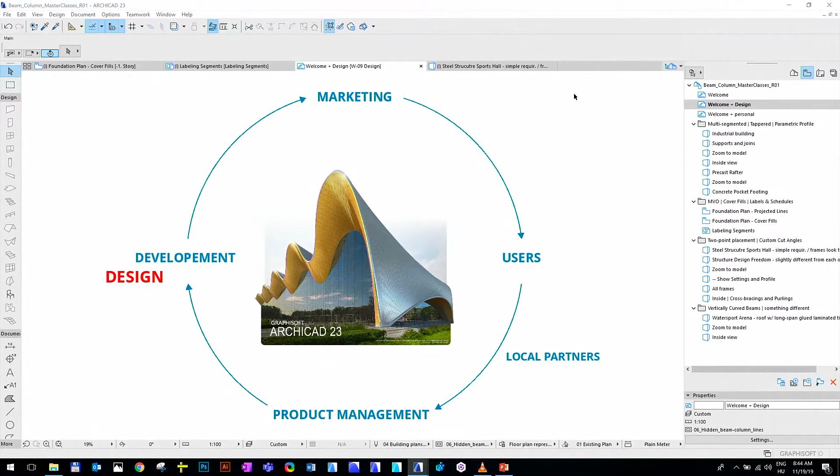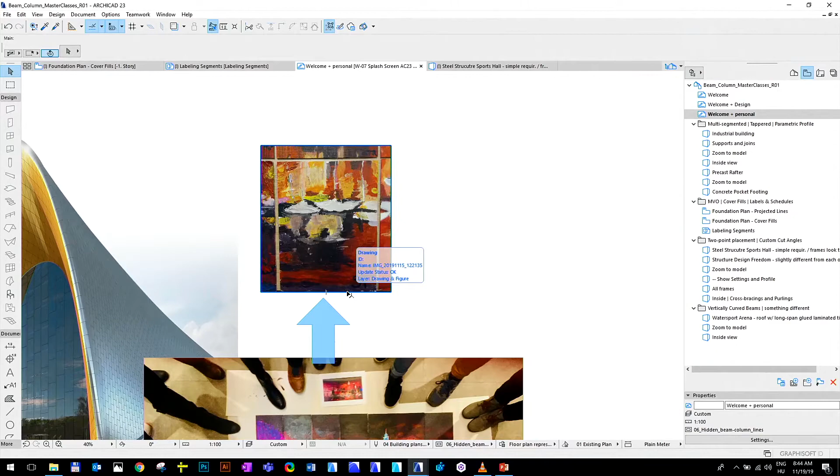And each of us got a slice like this, which is quite abstract, and it's really hard to see the big picture from this small one. So think about this as your profession. You are doing something that you are really good at, that you are concentrating on, and you try to make it the best you could.

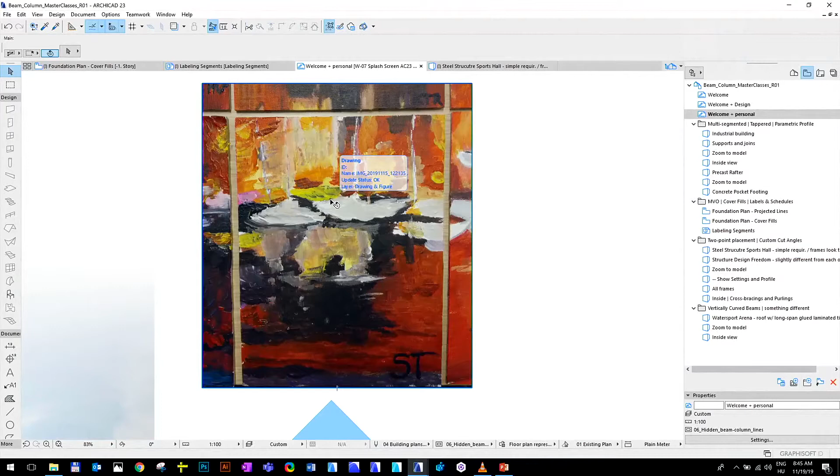But this is not enough in the end of the day to deliver the full picture for your clients, because you are in close relationship with all your neighbors, and your neighbors in this example are the other disciplines working with you. If you're an architect, you work with MEP engineers, structural engineers, interior designers, landscape architects, and the list is quite long. You are just doing a small picture, which is important for you and for the whole project, but you need to cooperate and collaborate with each other.

And why am I talking about this? Recently at Graphisoft headquarters, at the development, there were two main focuses to carry on with developing ARCHICAD. The first one was productivity. We want to deliver tools for you to work faster, to achieve your goals in a productive way. The other thing is collaboration. In the further years, we want to enhance collaboration between those disciplines to make their work easier together, to make that communication really good. This presentation will be mainly about these topics, and of course the new features of ARCHICAD 23.

Let's just jump into the first feature that I want to talk about, which is the new beam and column tool. The beam and column tool has been around in ARCHICAD for like forever. It is an essential part of architectural design, and we made some changes so it could fit more this collaboration theme.

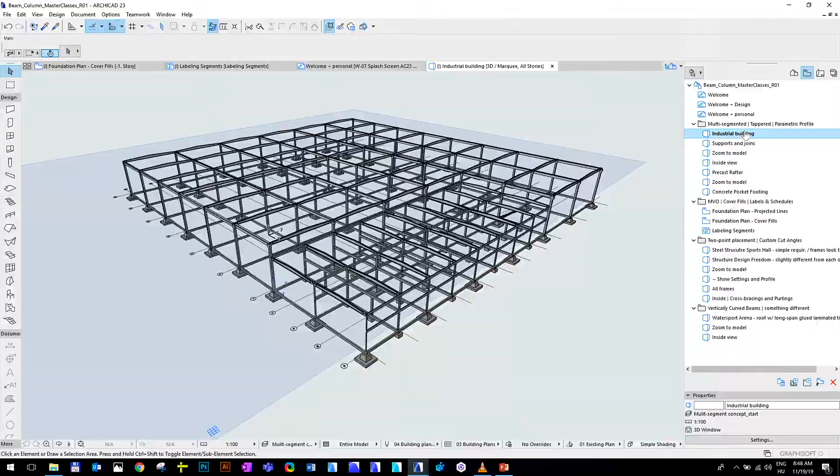So let's just jump into ARCHICAD 23 and the new beam and column tool. Imagine the situation that you need to plan, design, or build a structure like this. This is a typical industrial building, and the engineer requires you to use precast concrete structures to deliver it. We can see a pre-built model here which represents this idea.

Let me just zoom in to the supports and joints of this building. This is how the engineer imagined it, this is how he requires us to model the structures for him. For those who are daily users of ARCHICAD, you might ask yourself, how would I model this with previous versions of ARCHICAD? Well, some of you may say you would use the morph tool, some of you would create custom GDL objects. But both of these are nice methods...

You know that this is a bit time-consuming, sometimes really cumbersome, and it's not just the modeling you need to do. In the end of the day, you need to deliver documentation, a 2D documentation of this plan as well. And to create this documentation with those tools I mentioned was quite a struggle sometimes. We can all agree with that. So let's see how we could do this with ARCHICAD 23 with the new enhancements.

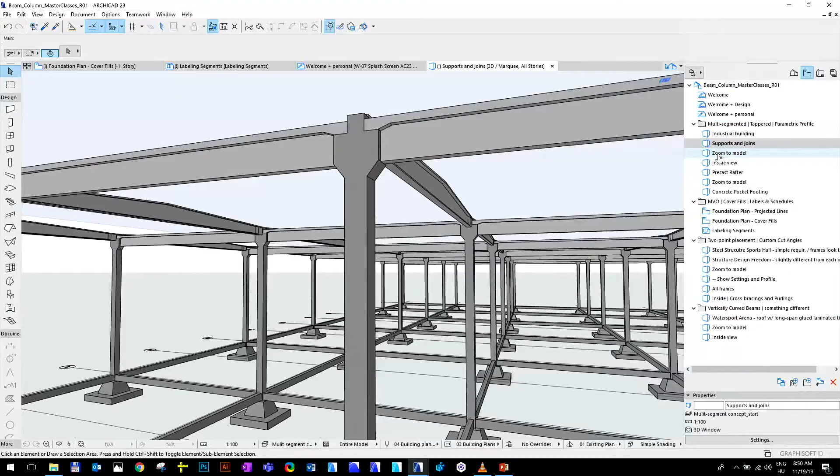Let me just zoom into this model where this part of the model is not ready yet. We can see it easily, we are missing the support that can hold this beam, and we have some problems with the beam as well. But let's start with the column. Let me just start the magic here.

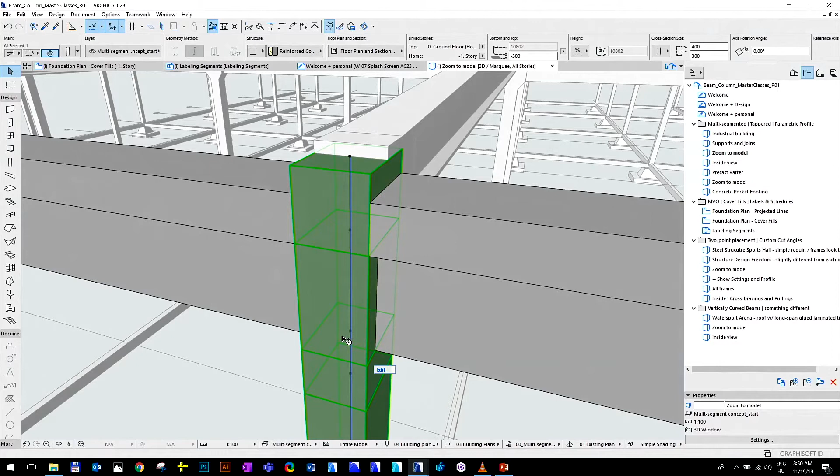In ARCHICAD 23, one of the new features inside the beam and column tool is segmentation. Inside the element itself, we can create separate segments, which are like divisions inside this element. So I can easily create some divisions inside it. And the characteristic of this segment is that if I go into the editing mode, I can easily manipulate and edit the cross section of this element if I just change it here. I can create a simple cantilevered support for this beam with just a few clicks, which is nice.

But the engineer would like to use a corbel type support instead of this simple cantilevered support. A corbel type of support is really similar to this one, but it has an angled bottom part to transfer the forces. Now let me just show you another nice feature inside the beam and column tool, and this is the tapered type of segment.

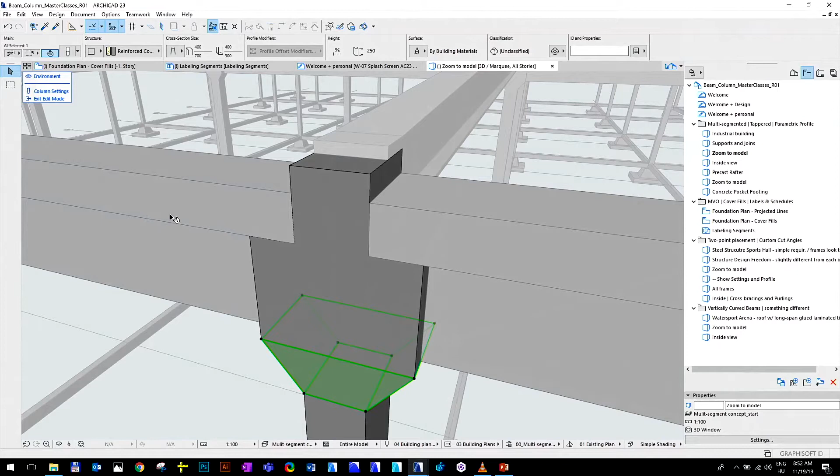And the tapered type of segment is special because you can easily set the dimensions of a cross section separately for the bottom and the top. So you can see here, I just adjust it by a few clicks, and now I have this corbel type of support, and my column is already ready, which I'm quite happy with.

By the way, it's really easy for me to talk about this topic because as a designer, I was part of the team who developed this tool. So if you have any questions, I will probably be the one who can easily answer those questions in the end. Now let's go forward because we don't have much time for this presentation.

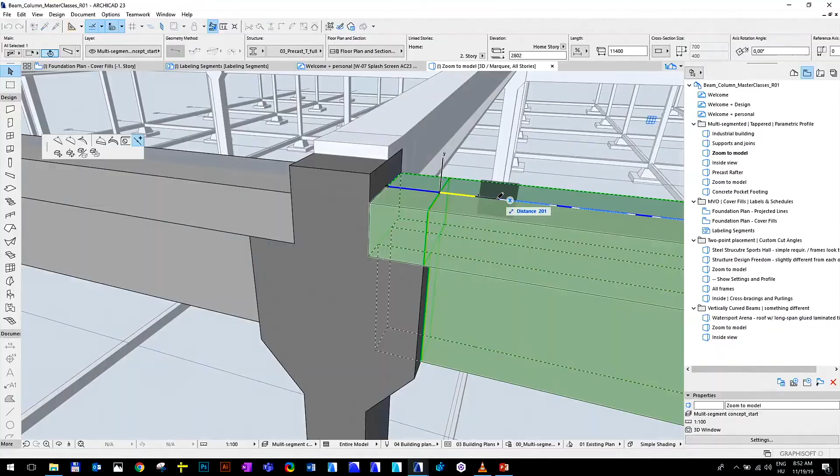Let me show you how we can adjust the beam as well. Now we can see that there are some problems with this beam. First of all, let me focus on the fact that this is a T-shaped profile, which, if you are familiar with last year's enhancements, is a parametric complex profile. How many of you use parametric complex profile in your daily work? Not many, so maybe it's nice that I can talk about this now.

With the parametric complex profile, in the profile editor, you can define some offsets for this profile, and in the unique instances where you put down that profile, you can make custom changes, some offsets of the edges that you predefined previously. Let me use this feature with the new beam and column features I told you about, and let's see what the problem is here with the beam.

Now you can easily see at this point that at the support part, we have some overlapping of geometry, which is not very good in this situation. We want to have this support, we want to make this connection a clear connection without these modeling errors.

You could create a new profile for this, a simple rectangular profile. But here I would like to show you how we can use the custom profile with the new features of the beam and column tool. Let me adjust the bottom part of this beam, this T-shape, and now we have this support at the join.

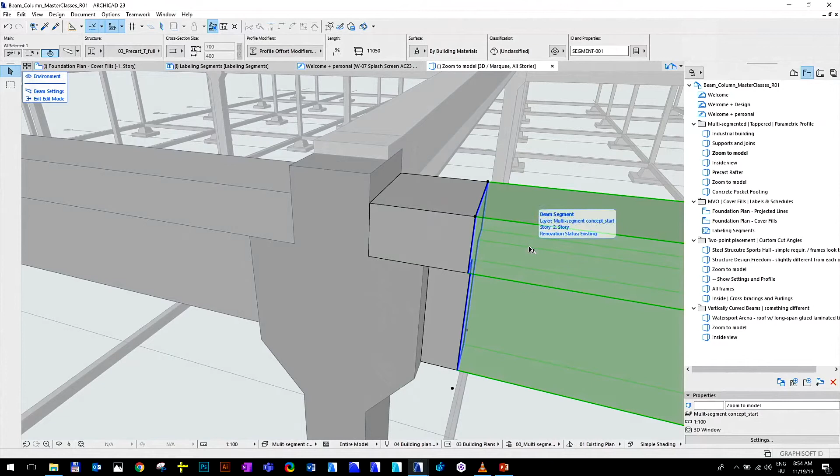The other problem we're facing here is that we don't really need this much thickness at the middle of our beam. We don't need it for structural functions, and also for economical reasons we would like to adjust it. So let me use another modifier here and adjust this part so it can be a bit less thick. With a few clicks, now I've created a more economic beam here.

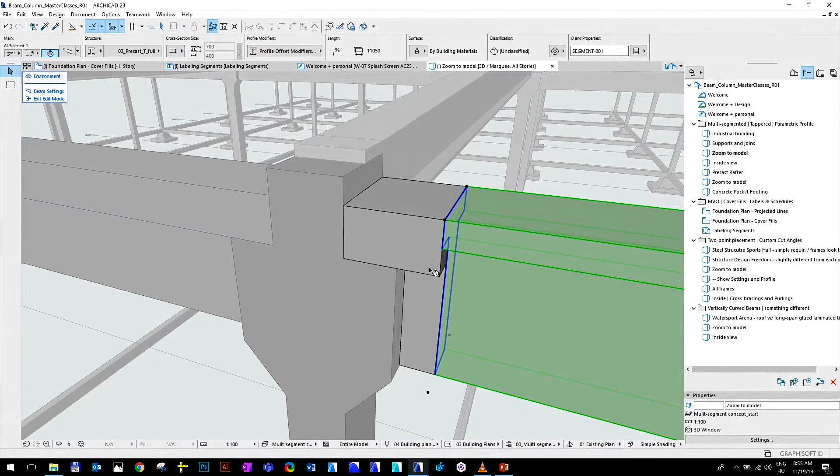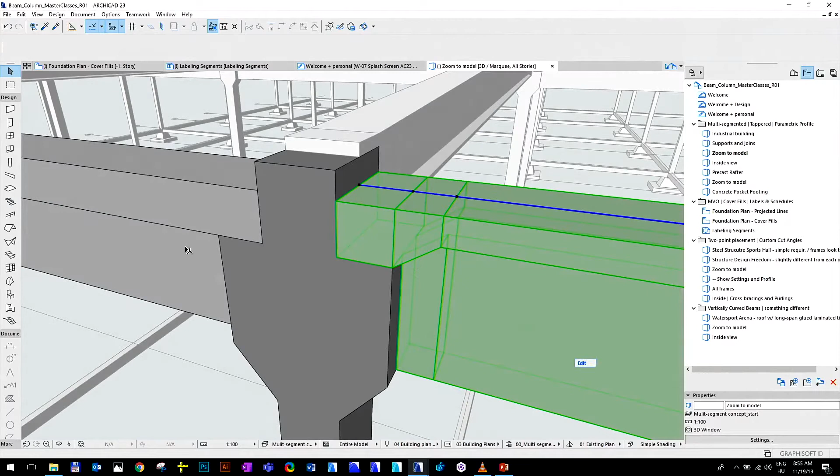But we still have the problem here with this gap - it's not connecting the two parts together. But we already know the answer for this problem, which is the tapered segment, where I can create the transition between the two segments at the side and the middle easily. Now, as we look at it from a distance, this is something our engineers might be looking for when creating these details.

Okay, so we can go forward, and let's see how this building looks from the inside. Now we can see that this is something we can easily make with the new enhancements of the tool. But let me talk about one detail here, which is the rafter of this building.

A rafter, if you're not familiar with the word - I'm not an expert in English terms either, so I needed to look up what a rafter is. A rafter is a beam that supports the roof itself. So here you can see it has an angled top, a slant angle at the top, and let's see how we can create something like this in the new version.

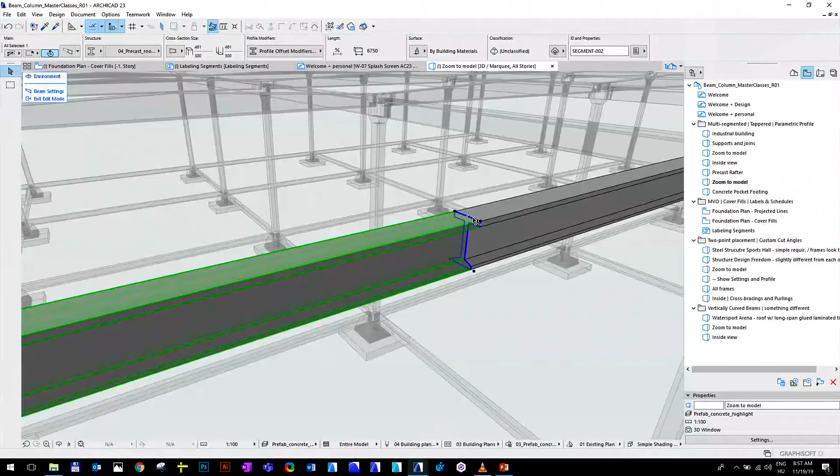So let's zoom into this model. It's already prepared for our example. We just need to use something that will make the top parts angled. So I can use - and we already know the answer - let me zoom in a little bit. The tapered segment, which is already set to it.

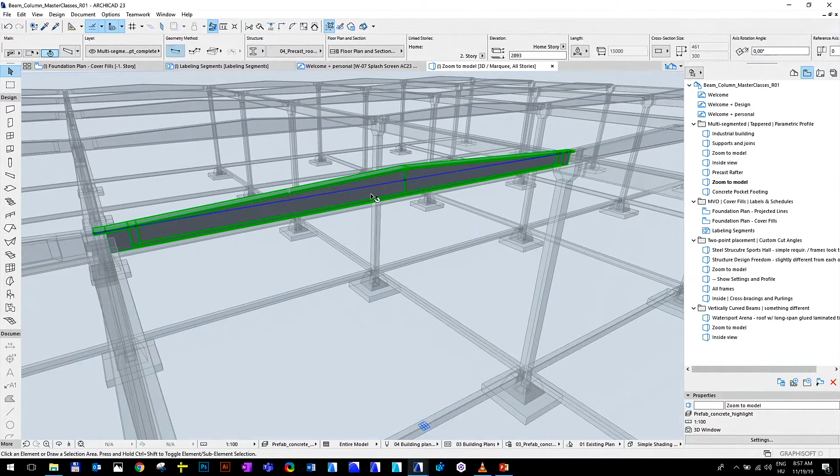And let me create this shape. And on the other side, I can just easily, if I select it, snap to the first created point. And we can all agree that this is something the engineer might look for in our modeling.

Now, I've shown you some modeling. Let me show you another example, another use of this tool: a simple concrete pocket footing. This is a very simple column with two segments. At the bottom, we have a simple rectangular segment, and we are using a custom profile at the top with some tapering and the hollow center.

So I showed you some modeling, how we can model things in the new version of ARCHICAD. But modeling is just a small part—a big part, but just half of the story of how we want to deliver these elements in our plans. The other really important part is the 2D documentation: the floor plan, the sections, and the elevations. We want to be able to create these with ease as well.

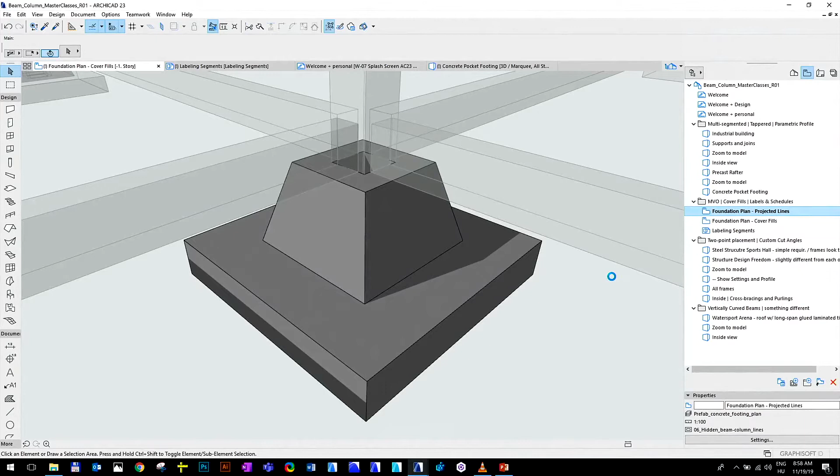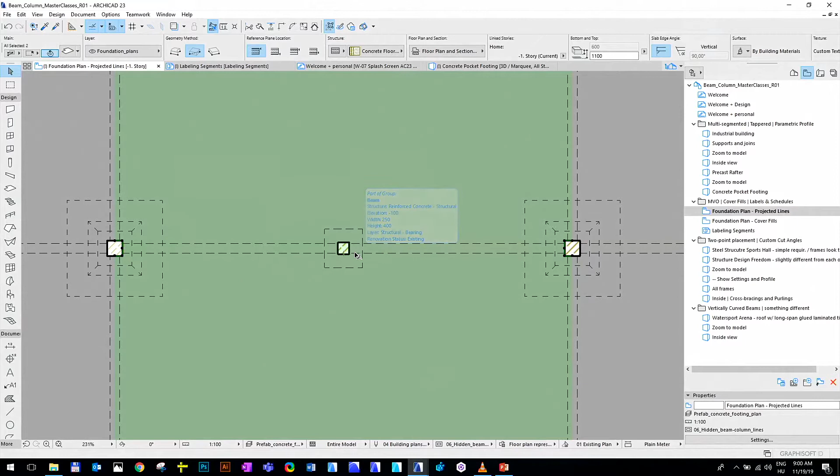So now you understand the situation here, and we can easily see that the representation of these objects is quite well projected. Hidden elements are automatically set to a dashed line, and elements at the section level are demonstrated by a solid line.

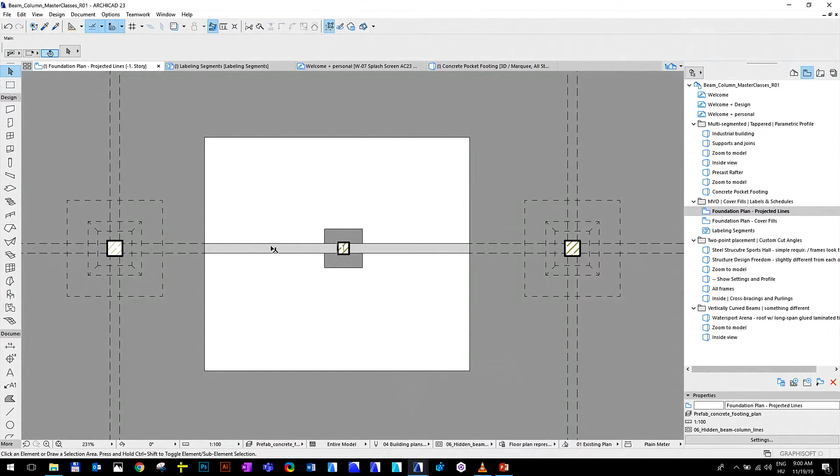But let me do a little twist here and create an opening inside this slab. Now you can see that ARCHICAD acknowledged that these elements are no longer covered by a slab, and it automatically changed the line type of these elements.

And if I adjust this a little more, I can show you that even if you want a hybrid line type—like a beam cut in the middle by a slab—you can easily generate this view of the hidden lines and the lines shown on the plan itself.

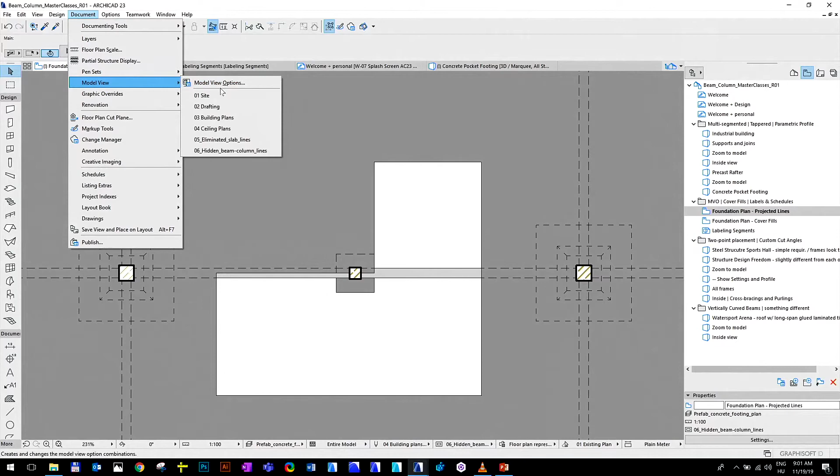But how can you access this new feature? You need to go to the model view option. You can access it either from the quick menu at the bottom, or from the menu under Document > Model View. Here you can see these options enable us to have the column and the beam with different representation depending on whether they are hidden under a slab or not.

Also, I want to show you a nice feature added in this version, about slabs. When we have two slabs facing each other and they are in connection, now we have different options to document this. We can either have the lines showing between them, as you see in this preview picture, or you can set it to hidden lines—it's a bit hard to see, but believe me, it's hidden lines—or you can set it to be eliminated, which is quite nice.

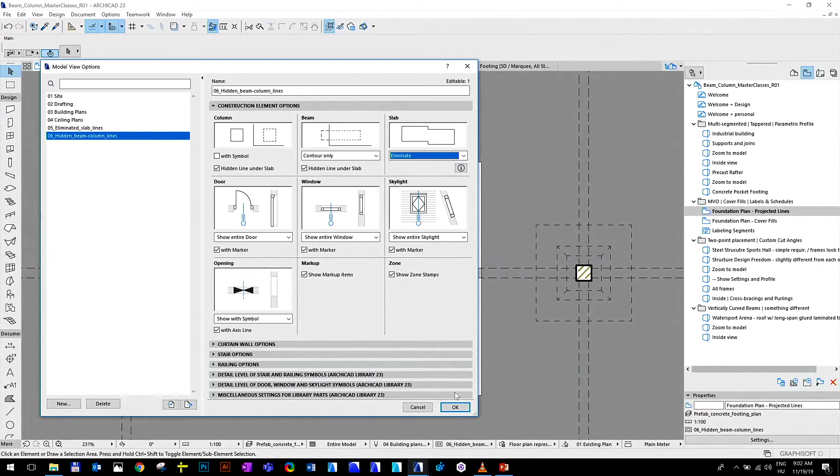Okay, let's go further on this demo. Let me show you another feature that was highly requested by our users—we'll see how you think about this feature now. Let me select some elements and open the settings dialog, which I'll talk about a bit later, and go to the floor plan section part. Now, from version 23, you can set cover fill for beams as well, which is quite nice—it was really requested.

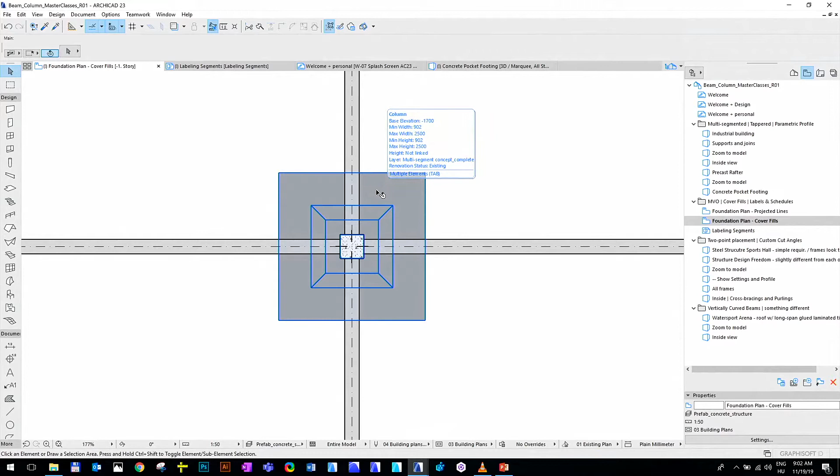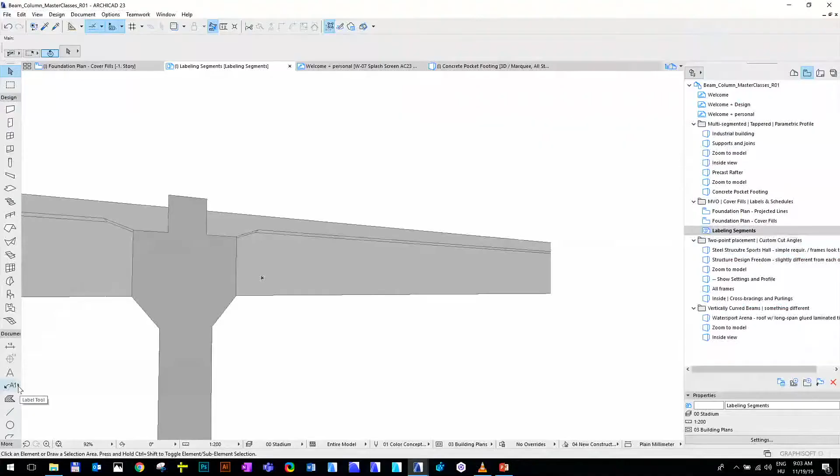Okay, so we talked about 3D modeling and documentation. What we're missing from BIM modeling is data. At Graphisoft, we love data, and we love to use it as well. For the new beam and column with segmented elements, now the element and the segments have data assigned to them. How can we visualize it, how can we easily demonstrate it? By using a label. Let me use a label for the beam element first.

Here you can see that actually this is a label made by a custom property, which is an expression. How many of you know the custom property expression? How many of you use it? Okay, that's nice. Quite a few of you.

But also what we can do here, this was on the element, we can put a label on the segments as well. And how you can do it might be familiar for you already. From the stair or the curtain wall tool, you can push the Tab key on your computer, and this way you can cycle between the segment and the element itself. Oops, there's some problem here. Okay, I was misclicking there.

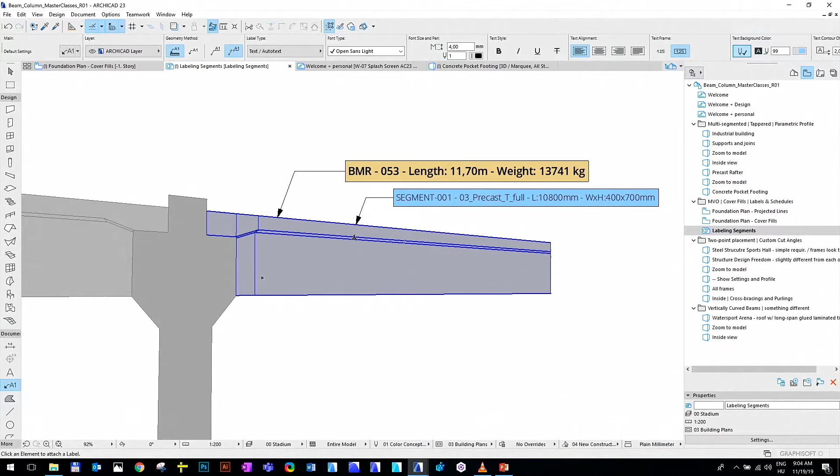So you can see that you can easily visualize different types of data by just using some label favorites and using the new beam and column tool. I talked about this with the precast concrete structures, but this is also true for all beams and columns, not just this type.

So let's move on to another structure type, which is the steel structure. And here we have a simple sports hall structure, which is quite easy, quite simple. It only needs some wall covering, some roof, and underneath it needs a steel structure. Well, this was quite easy to make with previous versions as well, but let's make a twist on this design and skew the structure a little bit. Let's distort the whole plan a little bit.

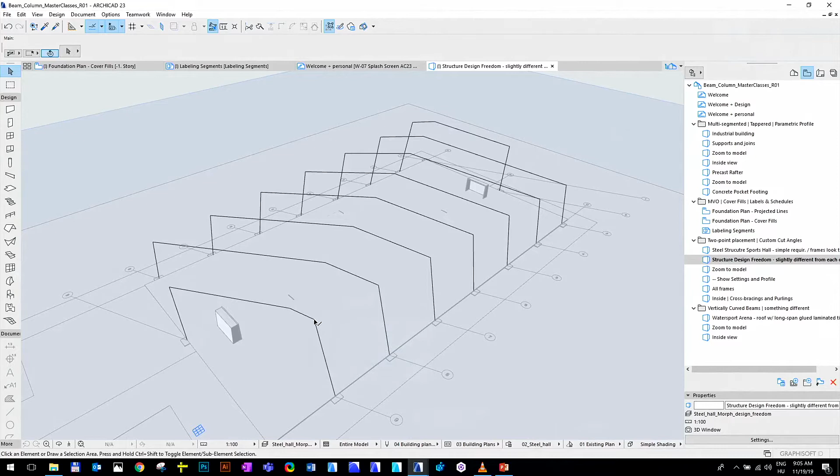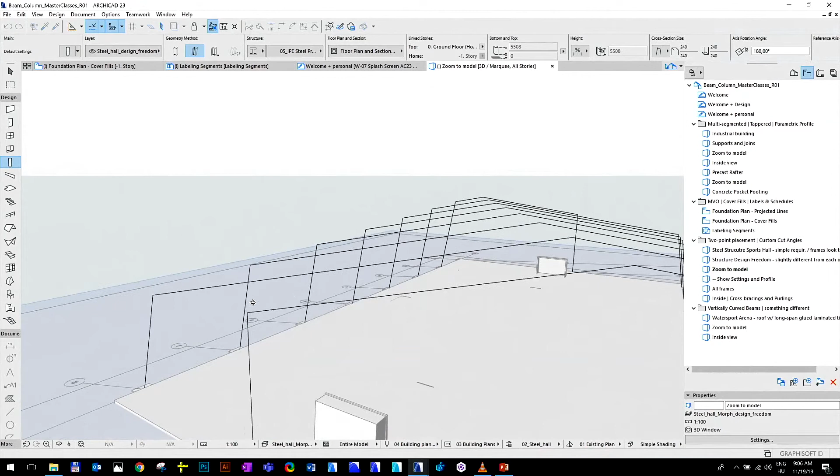Now you can see that all these frames are unique and they are not symmetric anymore. How can we do this easily with the new version? Well, let me just use another favorite, and I will use a column favorite here. And let me demonstrate a new placement method for the beam and column, which is a two-point placement. Let me try to show you a view of that.

Okay, so you can see from the preview that for the two-point placement you just need two points. You can enter two points in the 3D coordinate system, and it just snaps to those points. So here, if I just click on this, my element is created with the exact slant angle. I may have misclicked here on the bottom, but it's not very important in this example. And let me just create the other part here quite easily. And now we have the column.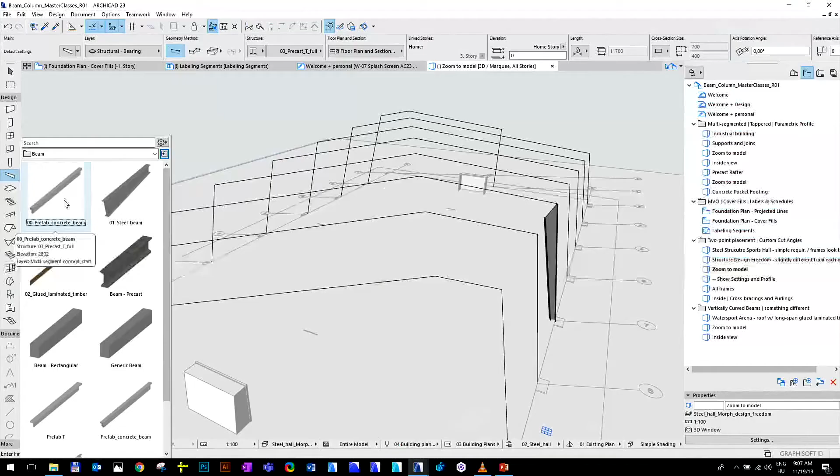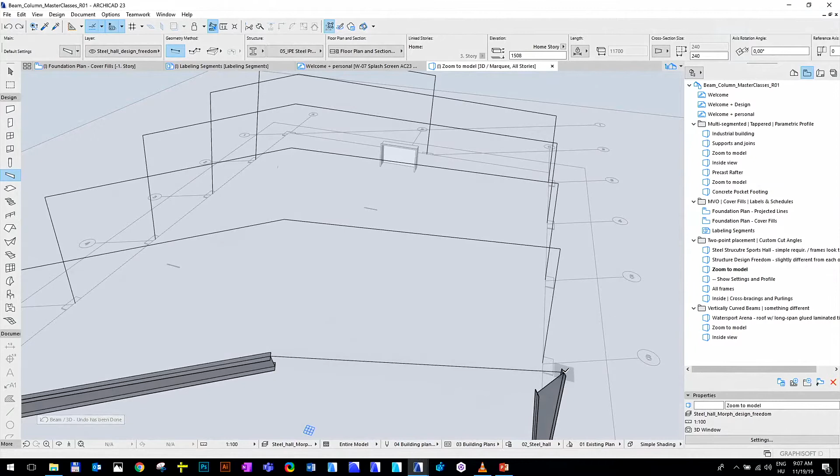We just need the beams that connect the frame itself. And let me use another favorite for this. And with a few clicks, I can create. Oh yes, here you can see that I misclicked the bottom, but let's just disregard it. Okay, it's not helping me now. Okay, so you can see that we created this frame with a few clicks.

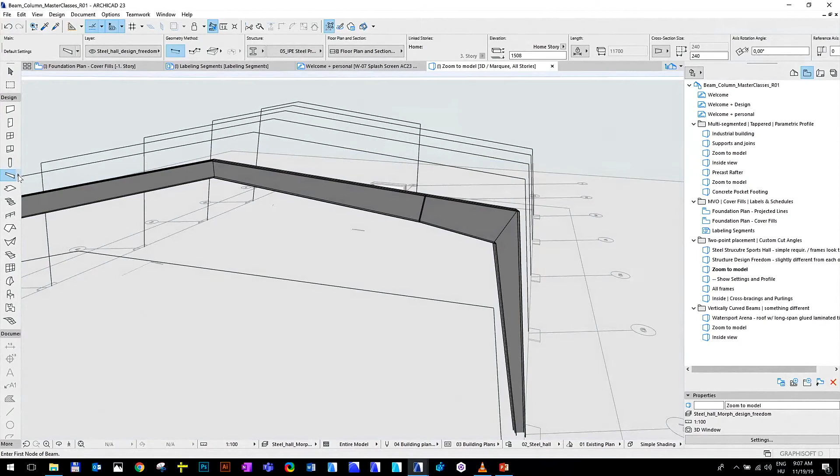And you can also see that there is a lot of information inside this, and you might wonder where this information is coming from. Well, of course, it's coming from the favorite which I used here. I can show you, it's here. But I will also show you the settings dialog for this element.

So you can see that the settings dialog of the beam and column has changed a lot from previous versions, but you can also see that it's familiar because it's really similar to the one from the curtain wall or the stair tool, which means that the beam and column tools are now hierarchical as well. So they can combine different parts into one element.

And let me just move to the segments part, where you can see that we have this list. Let me make this a bit bigger. This beam is built up from these three segments, as you could also see in the example. Another interesting feature that we also used in this example is that we introduced different types of length for these segments.

So you can either make it a fixed length, you just type in some numbers and it will stay that number until you change it from other sources, or you can set it to proportional length, which always adds up to the entire length of the element. So you can say you want this part to always be half of the element, and whatever size you give to a beam, it will always be half of that element. Really nice, I think.

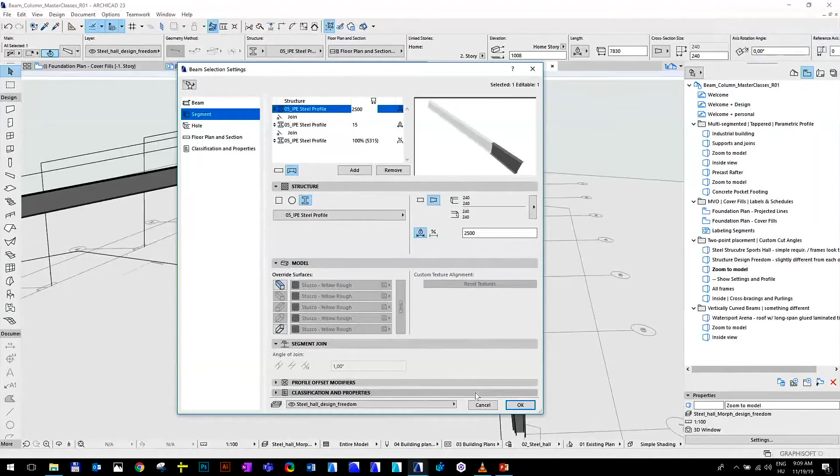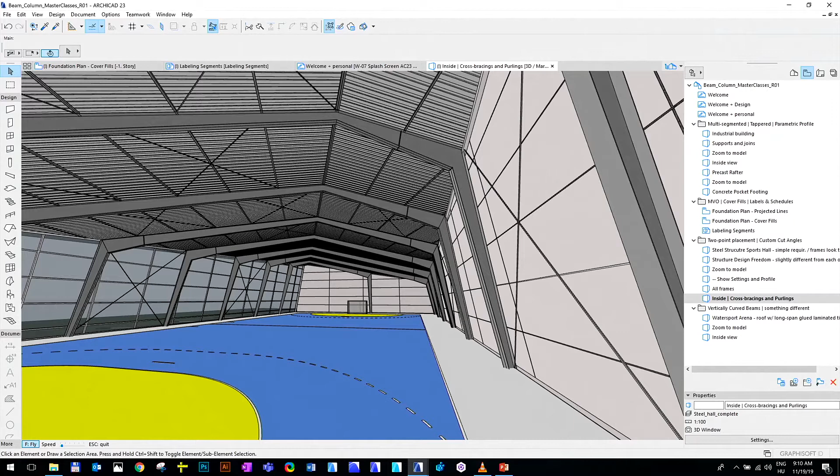Okay, let's move on and see how these frames added up in the end, which are quite nice looking. And let's see what the whole building looks like now. You can see that now with the new tools, we can easily create, for example, these cross bracings that strengthen the system, and all the other sub-elements, because you can use the two clicks and easily add them in any location inside this coordinate system. It's quite nice, I would say.

Okay, let me just...

Okay, finally, but last but not least, let me just show you a little bit more twist in this system. So up until now, I was talking about more of an orthogonal systems, which were using polygonal segments. Now let me show you another example, which is a water sports arena, where our engineers, and probably us as architects, I mean, I'm an architect, not all of you are architects, would like to use something out of this orthogonal shape and something that can bear this long span distance between the 2 supports.

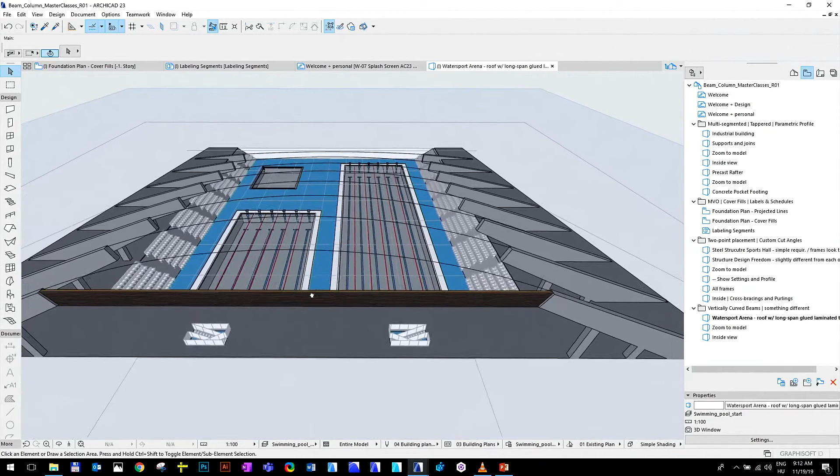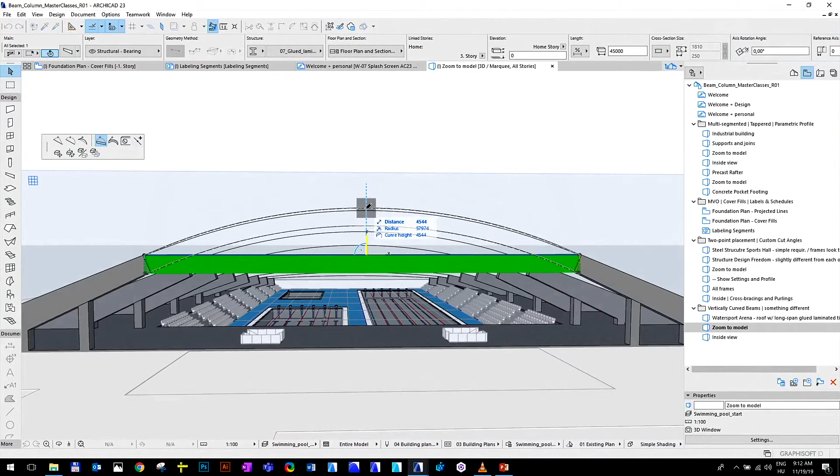Now, what we are planning to use here is a glued laminated timber beam, and let me just put it down here. And most of you already know that in ARCHICAD up until now, you could create curved beams in the horizontal plane. But something that we put into ARCHICAD at this version was to create, and let me just show you in the pet palette, a vertically curved element. So you can easily create a vertically curved beam now that can make up like this sports arena.

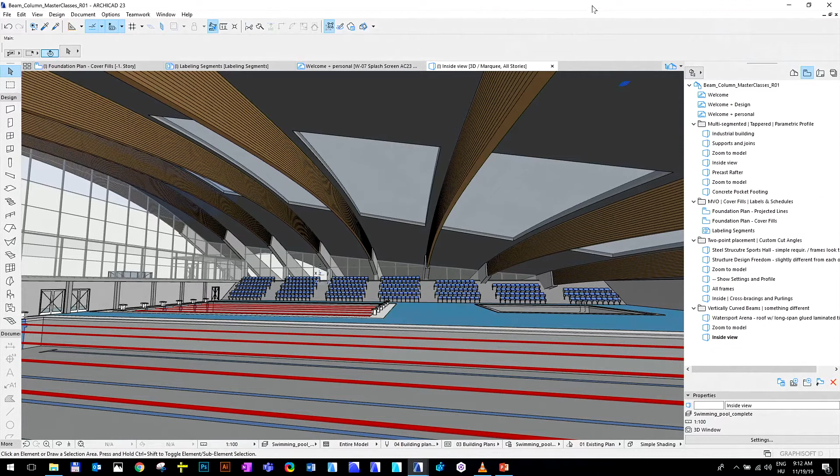And let me just show you how this sports arena looked in the end of our example plan. It looked quite nice, I would say. Okay, so this was about the beam and column tool. If you have any questions, don't be afraid to ask me at the end or after the presentation.

So let's move on to the next topic, which is also critical in this process of collaborating with the different disciplines. And this part of the presentation will be about the new opening tool. I hope you will like it. So, what is an opening and how to describe it? Well, the beam and column tools were elements, and the opening is like the absence of an element.

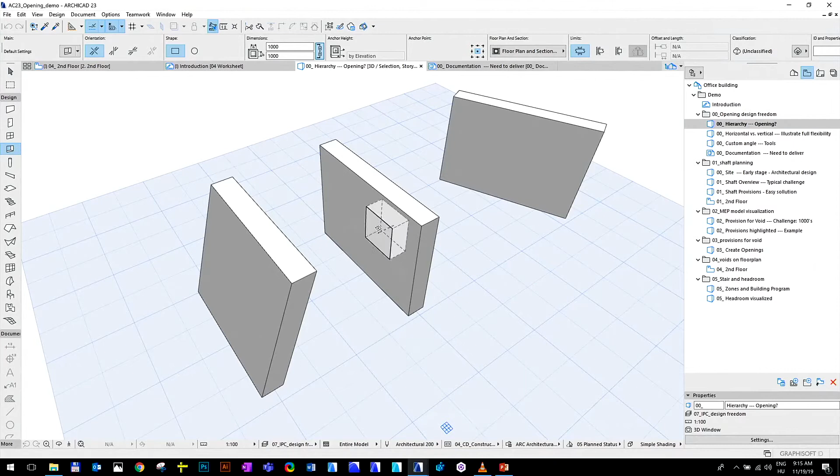So how could you create an opening in previous versions? Well, you could simply use a window or a door tool, and there we had some basic empty openings, which were used for architectural reasons, but we wanted to enhance this feature for more of a collaborating system for not just architects, but for the engineers as well. And now, with a simple click, you can create an opening inside an element.

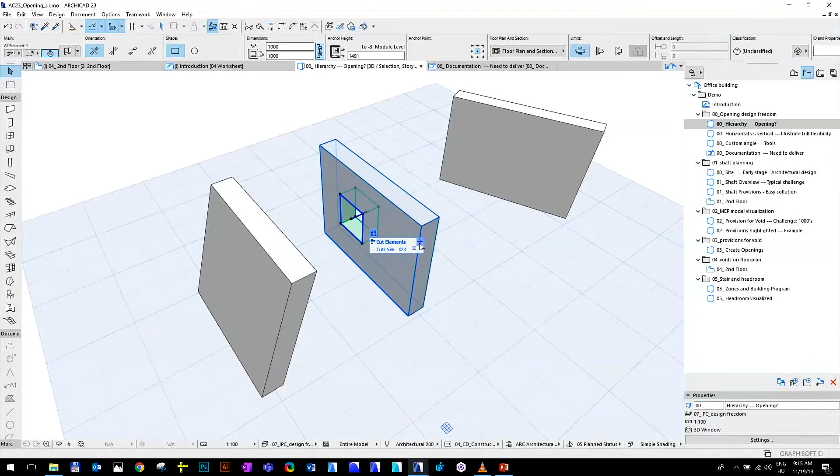And here, I will talk about a little bit of IFC, but I also want to tell you that I'm not a professional in IFC. You are probably a lot more professional in the field of IFC. But let me just tell you that in IFC standards, an opening can be set to one element, but it can also be set to multiple elements. It can go through multiple elements. So we wanted to keep this IFC standard in mind. So now you can easily add multiple hosts for one opening to create something like this.

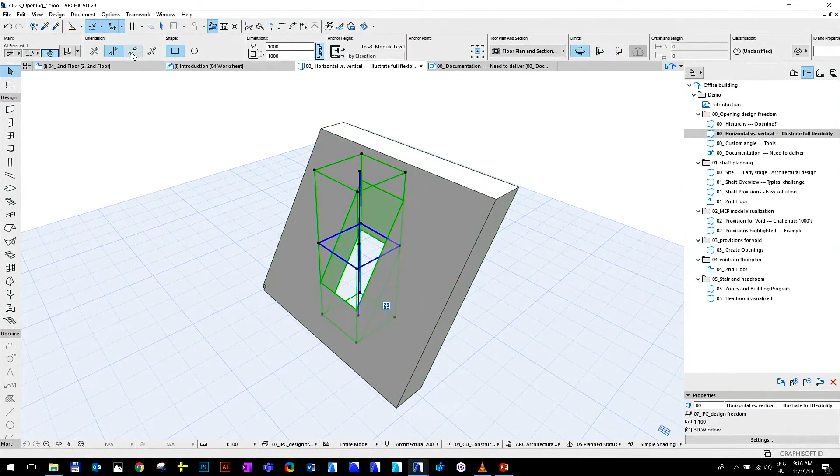And this is quite cool, but also we require some flexibility with the openings as well. And let me just illustrate this flexibility, because now with this new feature, you can of course align the opening with the surface that is the host for it, or you can create a vertical, let me just go out, or a horizontal, or a custom angled opening inside an element. And let me just elaborate this custom angle. Let me just show you an example.

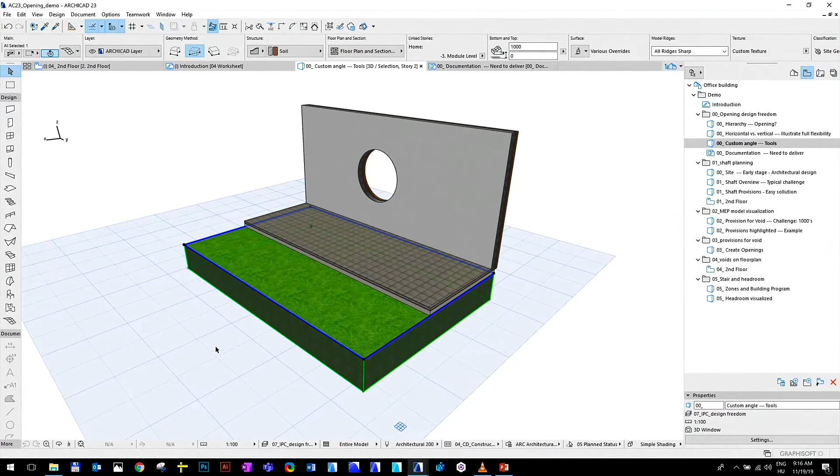And here, first of all, you can see that this opening is not a rectangle anymore. It's a circular one. But we also have some other elements. We have a wall here. We have a slab. And we have a mesh tool here. And I can also put down, for example, a big beam here. Oops, yeah. Show layer. Just for the sake of demonstration.

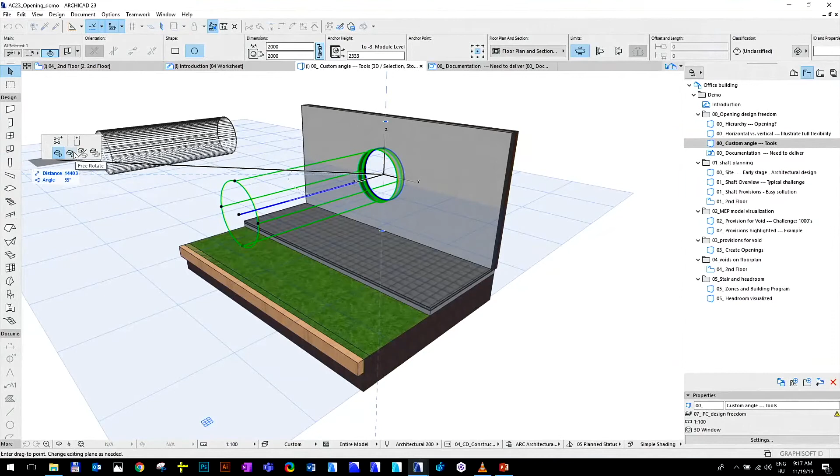And I was talking about custom angles, so let's rotate this opening, which requires some precision in 3D. Oops, and I of course lack the precision.

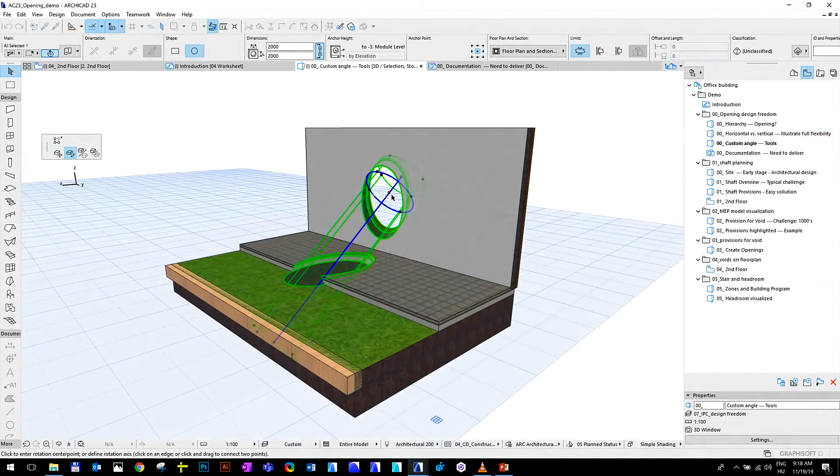Okay. So let's see if this opening can cut through multiple objects here. Oops, I overdid it, but yes, it can cut through. And okay. I wanted to demonstrate something cool here, but I, of course, missed my opportunity. And okay, we all believe that it can cut through the beam itself too. Let's just not waste time on it, because coordinating in this three-dimensional system is sometimes a headache.

Okay, so we can model this element, this opening. What else do we need here? Let me just refer to my previous sentences, what we need. We need modeling, we need the 2D documentation, and we need some data. And let's go first into the data part, because of course the opening tool can have some properties as well, and you can easily demonstrate these properties with a label or with a schedule.

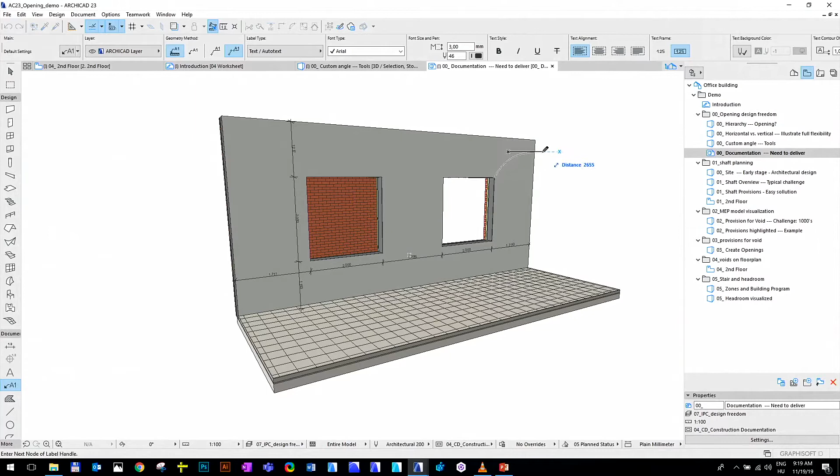Let me just show you one label, because it's a lot more interesting to look at than a schedule. And let me just put it here. And you can see that this opening has some ID, has some dimensions, and has a classification. But you can add a lot more properties to it that you can visualize with labels, or you can list in a schedule.

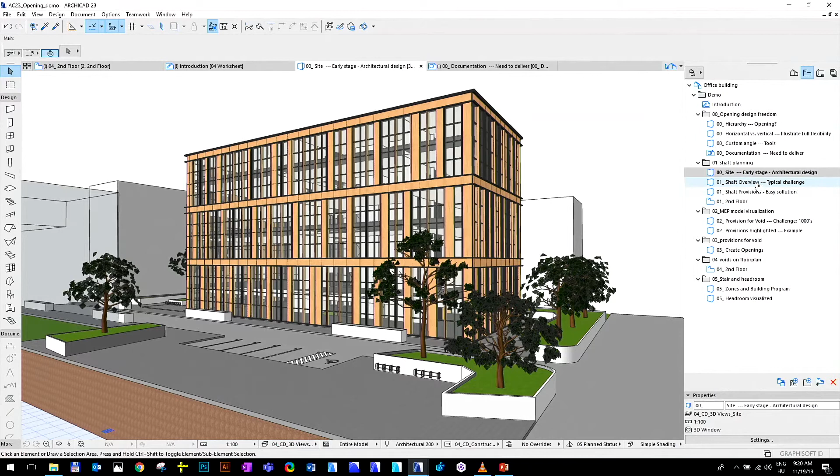Okay, but let's start with some examples and see how we can use this opening tool in some real-world examples. Now let's look at this building. We are in the early stages of the design, and this will be an architectural example, but there will be some engineering examples later too. So we are in the early stage of the design, and a typical challenge here for an architect is, for example, elevator shafts.

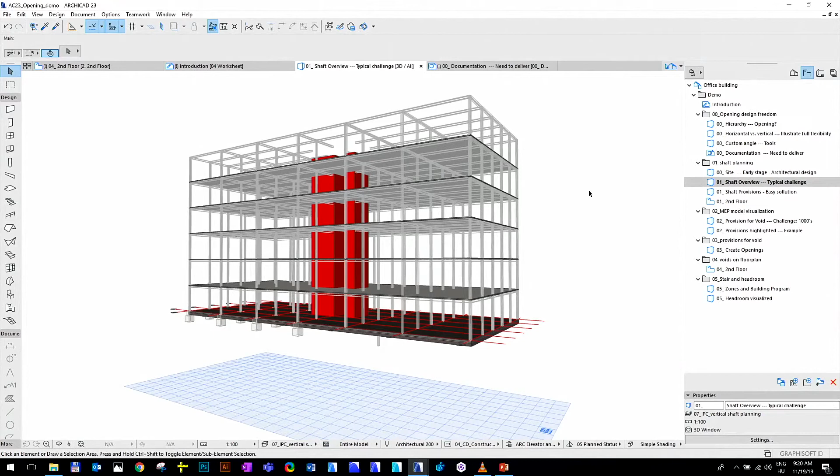So in previous versions, to create an elevator shaft that goes through multiple levels, for example in a high-rise building, it was quite a challenge because you needed to make those openings on every floor, and you needed to create the 2D documentation of this opening on each floor as well. So for example, on a 50-story building, if you had multiple elevator shafts, you would have needed to do this like 100 times, which is not the best productivity, and it's not even a good design task to be done.

So what is the solution here with the new opening? We saw that you can easily create it one by one, and you can easily connect them together, but it's still a bit of a hassle if you want to create something like this. So we kept this in mind, and we created something that is using provisions for voids that you are probably familiar with. How many of you use provision for voids in your daily workflows? Okay, that's a bit surprising.

I will talk about provision for voids later, but the essential thing that you need to know about it is that when the engineers are working with an architect, their disciplines might collide. You can have some structural elements, which are the domain of the structural engineer, but there might be some ducts going through these elements, and there the MEP engineer might require you to have some openings inside structural elements, and this is where the challenge begins, because you need to communicate and collaborate on these problems quite well.

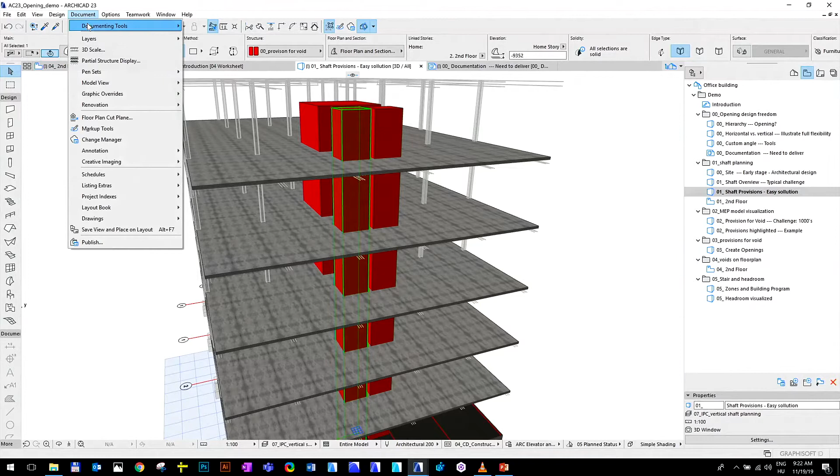So here, to create these provisions, we use some morphs, but you could use any objects for this function, and I can use this morph to cut through all these floors with just one click. And I can do this multiple ways. I can just go here in the context menu. I right-clicked, if someone didn't hear it, and use the Create Opening from Selection tool.

Now here we have some options to choose from. We have an option to choose the shape, and I just leave it on automatic. We can set some offsets if the engineer didn't define a clearance around his ducts. We might want to use some offsets here, and we can select keep original elements or let them be deleted. I will just use the delete option because it will be better for this presentation. And here we have some merging options.

You can either set it, here in this example, for the height of the floors and create an opening, and this will create one opening that, okay, I misclicked it.

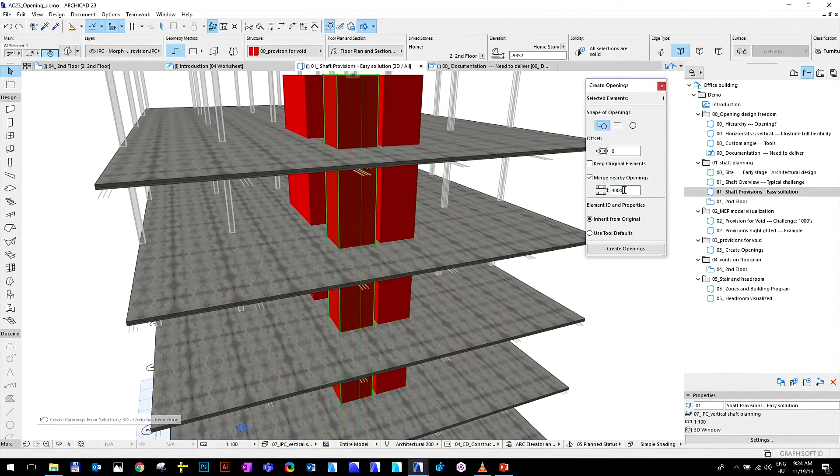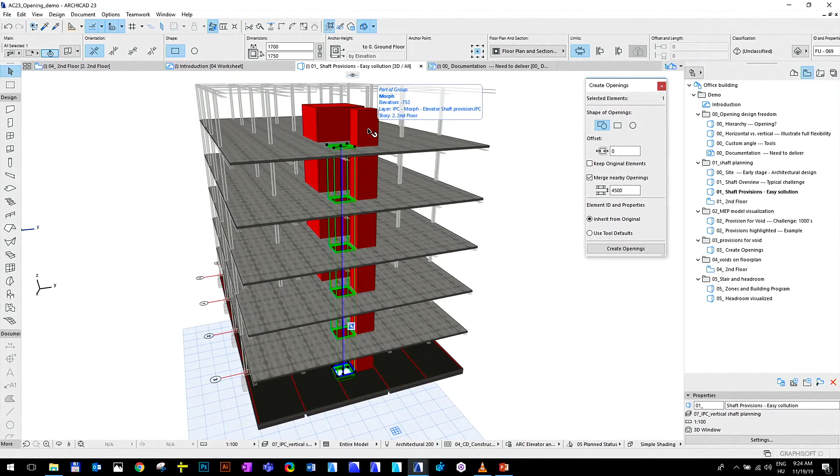Okay, so let me just go back. Because our floors are taller than 4,000 millimeters, let's just set them to 4,500. And you can see that now I have created with a few clicks an opening that goes through a whole building.

Now this is one workflow, and the other workflow is something that I accidentally showed you, which is when you don't want them to be merged. And we advise you to use this more often, because here individual openings will keep their individual data, and you can see that every opening here is created one by one, but with only a few clicks, and you didn't need to go through this.

And now you might wonder, okay, I talked about the modeling, I talked about the data part. Now, what about floor plan? Because previously we needed to create those symbols one by one. And of course, now with this new tool comes the automatic generation of the symbol for this opening. And here, as you can see, this is what I'm talking about.

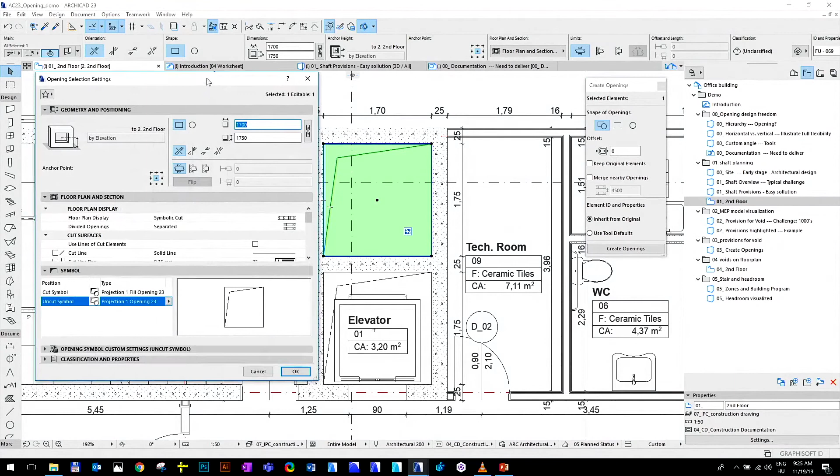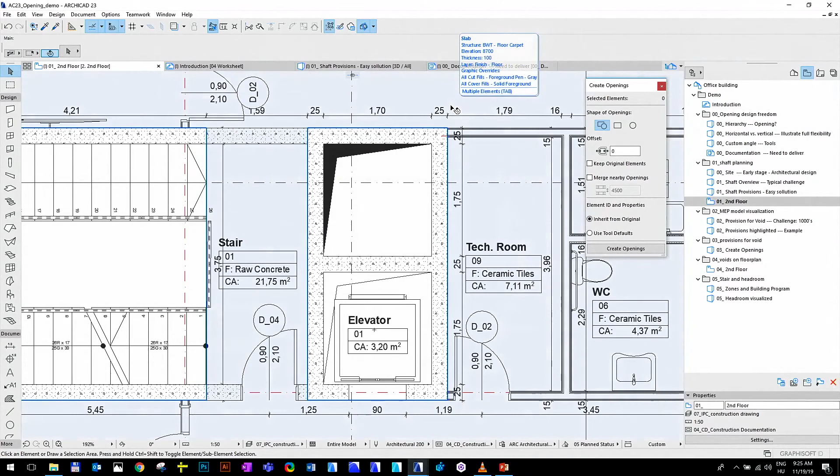And you can use the options menu. Just disregard this noise here. I'm concentrating on this part. And I can set the uncut symbol for, in Hungary, we would set it for this one. And here you can see that it's automatically generated and it can fit the standards of your own country. Unfortunately, I don't know what Sweden uses here, but I hope that you can find the one symbol that you are using in your office standard symbol.

Okay, let's go back to this provision for voids workflow and how we can use this in the daily communication between the different disciplines. Now, this is a simple project, and you can even see in this simple project that we have a lot of MEP equipment on the top, and also here there are some equipments, a lot of equipment for the air ventilation, for the heating system. And as I already mentioned, these parts at any point can collide with some structural elements.

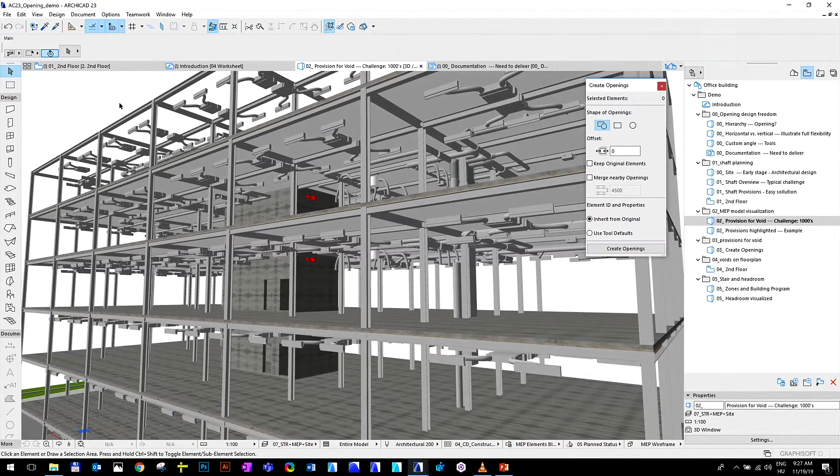And when this problem arises, here is where we use this provision for voids workflow, where the MEP engineer sends the structural engineer some morphs which represent their elements, which are colliding with the body of their structural elements. And they need to cooperate and communicate this problem with each other. And here we have these problematic situations highlighted, where the elevator shaft and the structure of the elevator shaft is colliding with these small parts of engineering, these ventilation parts.

And you can see that here in the example project, these are like 40 maybe, or 30. But in a real project, these challenges may have like thousands of collisions. So in a real project, managing all of these problematic situations might be a real time-consuming hassle for you. So what we can offer here, and let me just zoom further into one of the problems here.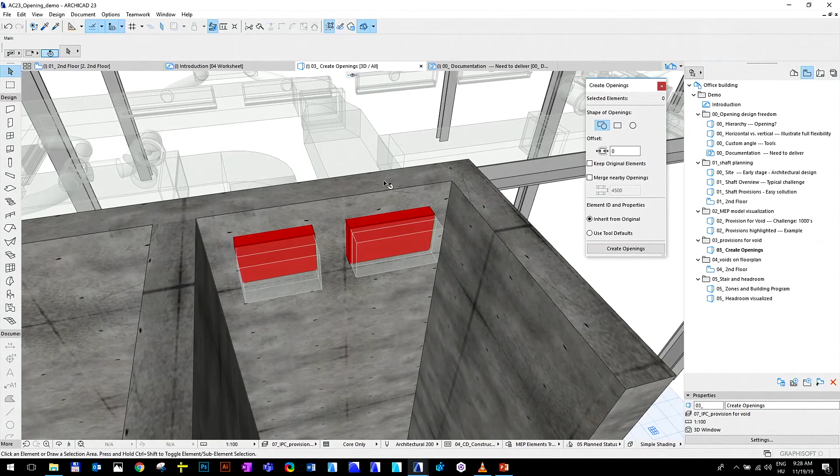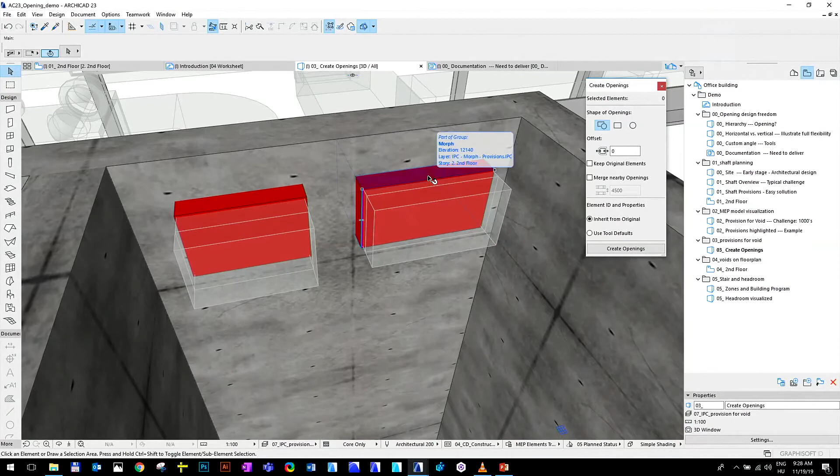By the way, here we use some graphic overrides to filter out the elements that are not really necessary for our presentation. So here we have this air ventilation system going through one of the structural walls, one of the structural elements, and we can already see that the engineer who created these red morphs already thought about the offset, the space next to the elements that he wants to use there. So what we want to create here, we want to create some openings inside the structural element. And how we do it, we already know.

We use the create opening command. And here, we don't need the offset because the engineer has already done it. In a real project, I would say keep original elements, because me as an architect, I have nothing to do with the engineer's part of the model, so I don't want to interfere with his doing. But for the sake of demonstration, I will now delete these red boxes so we can see what is happening. And I don't need to merge these elements together. So with a few clicks, I created these openings in the wall. And here you can also see on the floor plan that this created these two symbols inside my floor plan.

Okay, now we talked a lot about openings. I will show you just one more example, and this will be from the architect's perspective again. And this is about a refurbishment. Now, I don't know how often you do refurbishment projects here in Sweden. Do you do it often, or is it something... Okay, I see a lot of people nodding, so you do a lot of refurbishments.

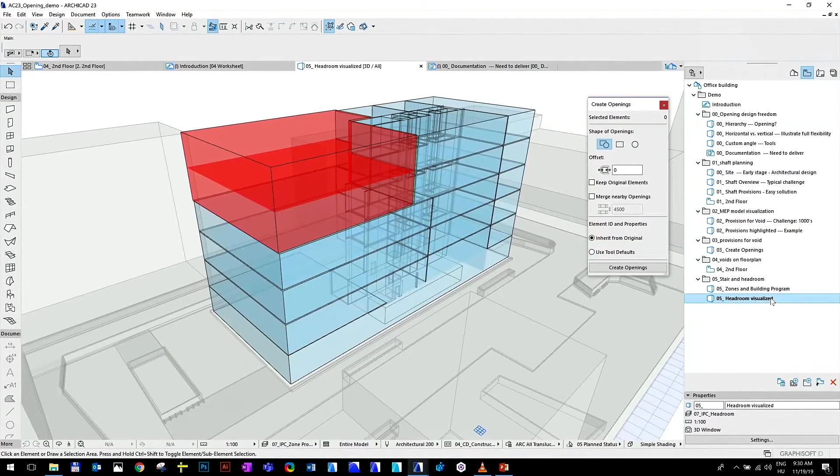Now here the situation is that we have this, for example, office building, and we have a new tenant who wants to refurbish his part of the building, and he has a requirement for us as an engineering team, as an architect team, that he needs to connect these two stories that he's renting from someone. And for this, he needs an internal stair.

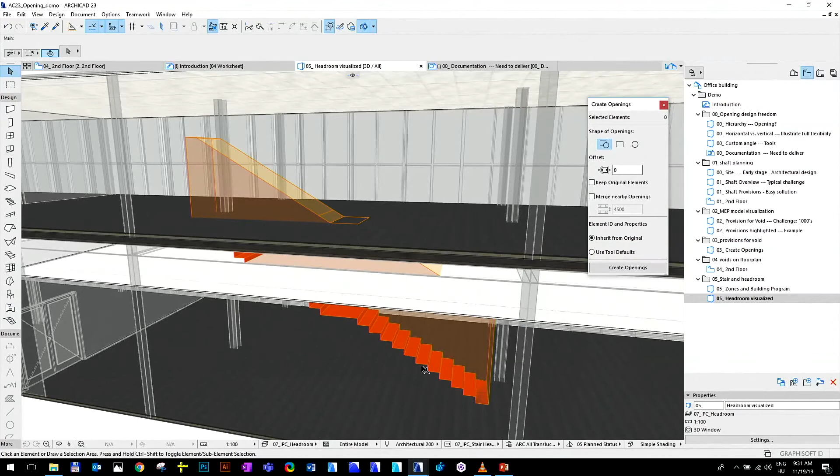Now, for this demonstration, we enabled the headroom space visualization. I really hope that the ones who use ARCHICAD know about this feature because it can be a real time saver. And we will use this headroom visualization to create an opening. And how do we do this? Of course, we do this with the Create Opening tool.

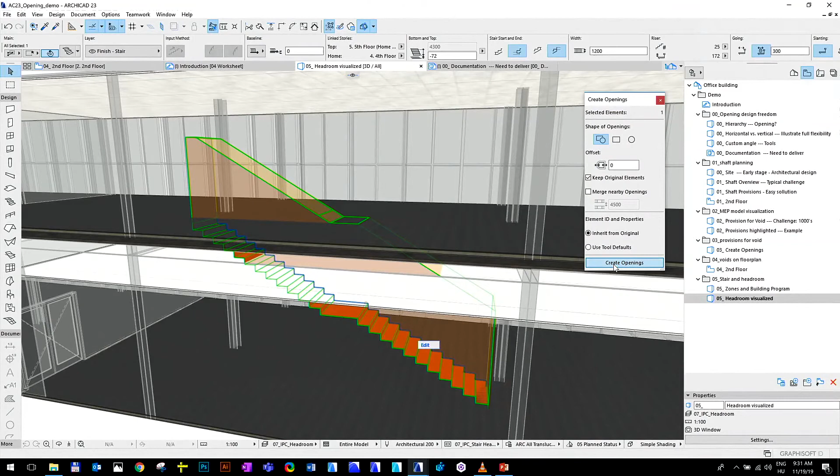And here, I want to make sure to keep the original element because I don't want to delete my own stair. And let me just click on Create Opening. And as you can see, let me just go to here. It created an opening that fits exactly to the headroom requirements of my stair, which can be a real nice time saver and real nice thing for productivity. I hope you liked the opening tool. I think this was quite cool.

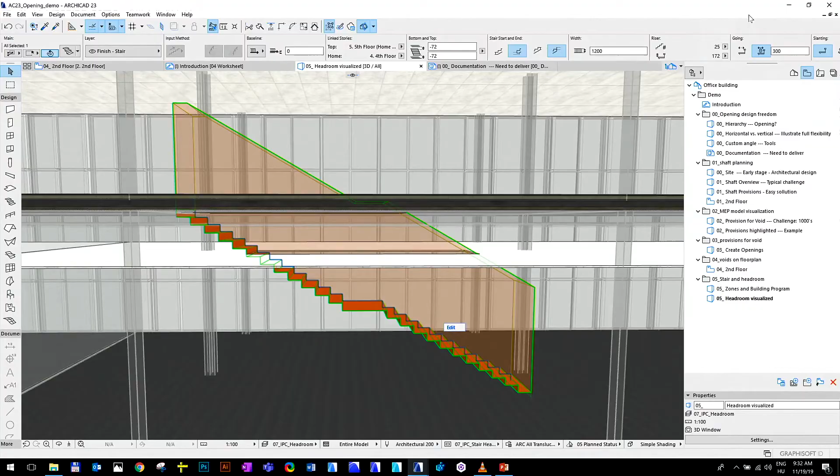But let's go further and let's... About 10 minutes? Yeah, make it 5. Okay, let's make it 5. Then we will have time. Okay, so later, more details.

So let me just go further and talk about some performance enhancements for the new feature. Well, performance is always really subjective, so it's really hard to talk about it because when it gets a bit faster, no one really notices 5 seconds of quickness in a 40-second load time. So we wanted to, of course, focus on making the software quicker, but we also wanted to make it feel quicker. This is why we implemented some of these hidden gems that are about the performance and the quickness of ARCHICAD.

So imagine your everyday, how you start your day. You start ARCHICAD. You want to continue the project that you left the day before. You start it and you know that it's a big project. You go to the coffee machine, you drink your coffee, you talk a little bit with your colleagues, and then you go back to your computer just to notice that your file isn't loaded because there is a message showing you that there are some problems like a missing library, or do you want to load it from an archive file, and you are really angry, you're like, why did I leave my desktop computer?

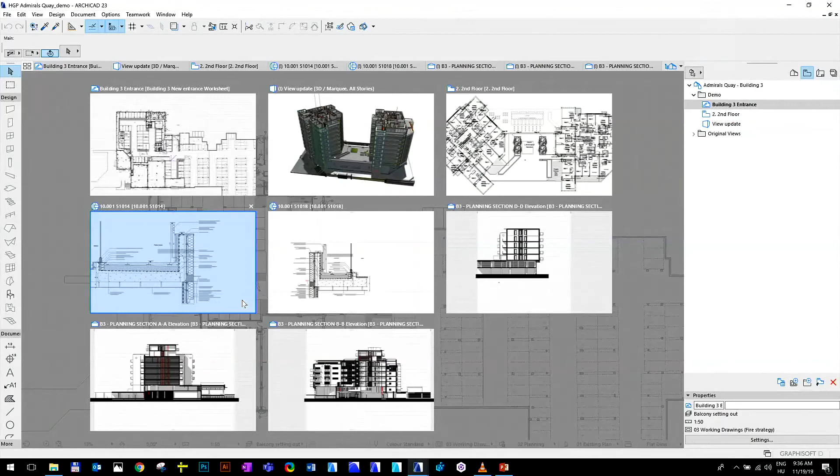But also, we have these images here, and this might bother you. You can, of course, turn these off in the work environment. But the other thing that can help you in this process is this tab overview, where you can easily find what you are looking for. You might be working with multiple very similar sections, and you might want to use this one and not this one, and from the name you might not realize that you were looking for that. So what happened meanwhile on the other monitor? Yes, so we didn't get those questions.

So you might ask, okay, is my project all good? Am I not getting these questions because everything is fine? No, actually this file has some problems, and here I can show you how this new feature, the Action Center, comes into picture. First of all, it speaks the language of colors - we have red, orange, and green. You might think the red is bad, the orange is still bad but livable, and green is okay.

But if I click on it, it can tell me some important information, and of course I can access my well-known dialogues from this one page, which is really nice. I'm pretty sure the BIM managers will be really glad about this feature.

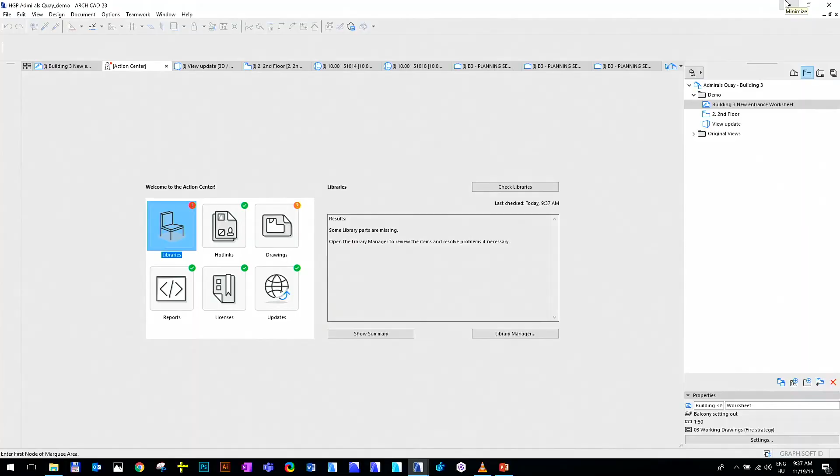Okay, so this was quickly about performance. I wanted to talk a little bit more, but let me just move on. The final topic that I wanted to show you is BIMX.

How many of you know BIMX? Ooh, that's really nice. And how many of you use BIMX in your practice? Wow, I'm really glad about this.

So for those of you who don't know BIMX - in BIMX you can basically see, well first of all, you can publish a BIMX file from your ARCHICAD project really easily from the publisher. And after you publish it, you can publish it to the BIMX transfer site, where you can easily access it from an application.

I don't have an iPad or another tablet here that I can show you, so I am just showing you these pictures, but you can easily access the structure of your project from BIMX, and you can access the layouts, the 3D view, any of the views, and you can easily use it for presentation. This is the main focus, presentation.

And what we are cooking here - up until now we had BIMX, we had BIMX Pro, they had different sales and marketing strategies. But now we created BIMX Lab, which will merge these different types into one application from January.

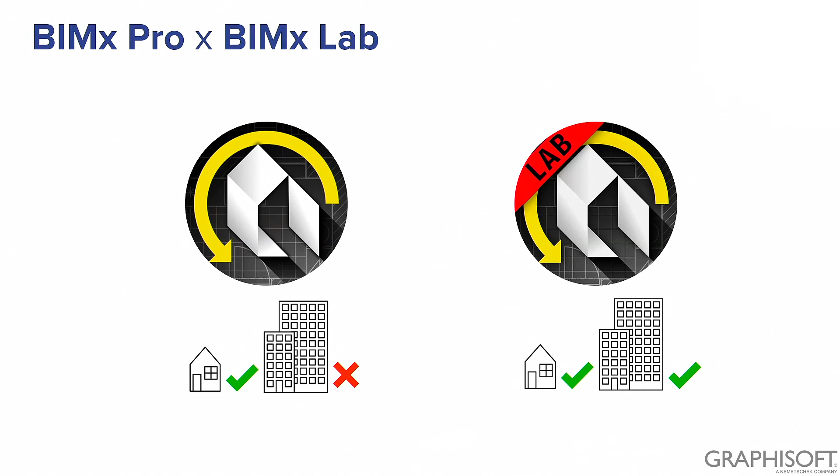And how we did this - this is where my demo will come in handy, and this will be the last thing I will show you, I promise - is this video. I will talk about it because it's muted.

So here on the left, we have BIMX Lab. On the right - okay, I'm a bit surprised because it's mirrored. On the left you have BIMX Pro, on the right you have BIMX Lab, and it's a comparison video that was recorded on an iPad Pro.

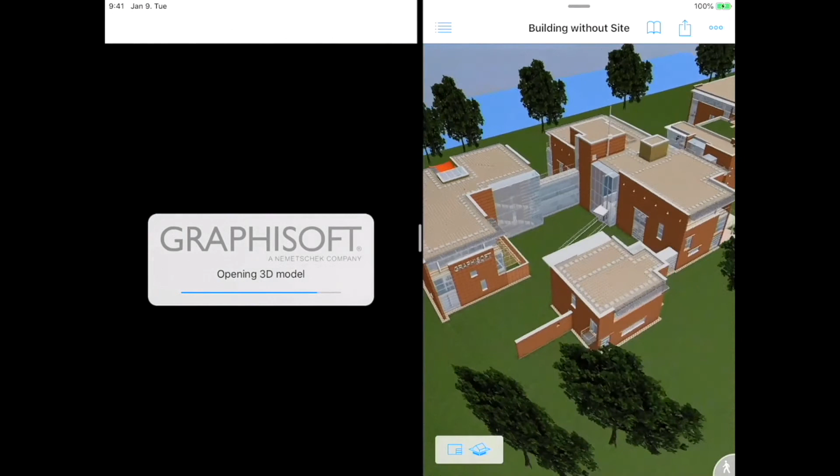And what you can see here is how those two applications look like, and you can easily see from this beginning point that BIMX Lab is a lot faster, because we introduced this modeling engine that, first of all, instances elements - which means that if you have multiple instances of one type of element, it will only load one, and the others will just be a multiplication of that one.

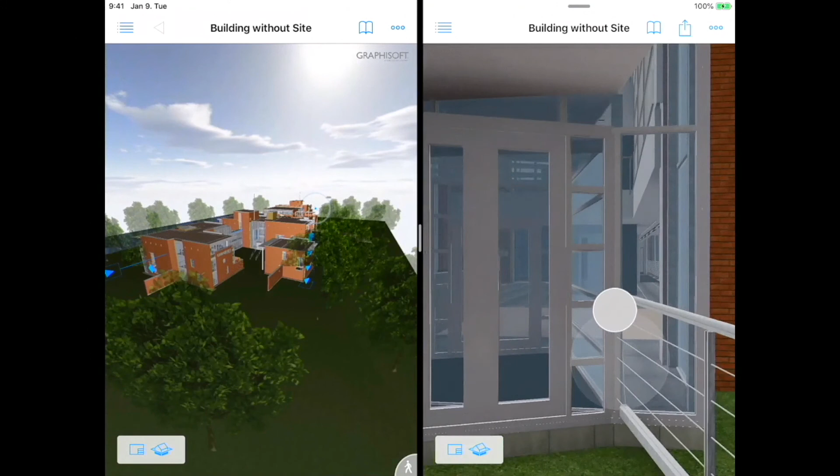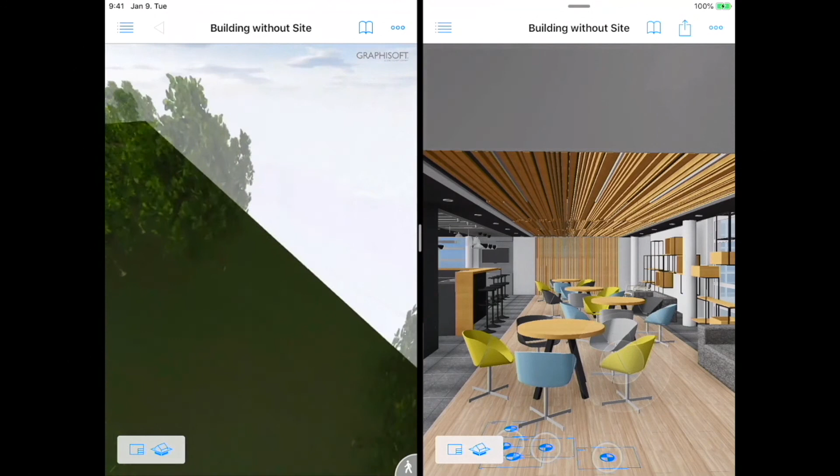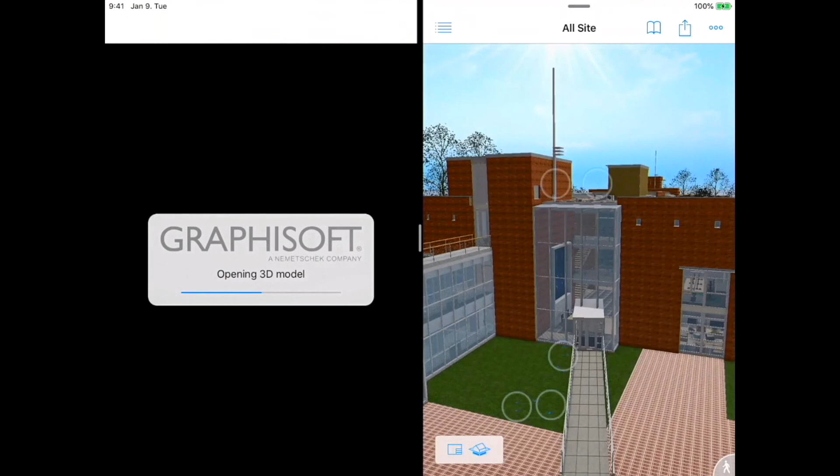And the other big thing is that it's now using this technology that Graphisoft developed - how is it called - the memory streaming technology, which means that every time you look somewhere with the camera, this engine will only load that part that is visible into the memory. So even if you have a big model, only that small portion will be in the memory, meaning that even a really big model will be able to load and navigate.

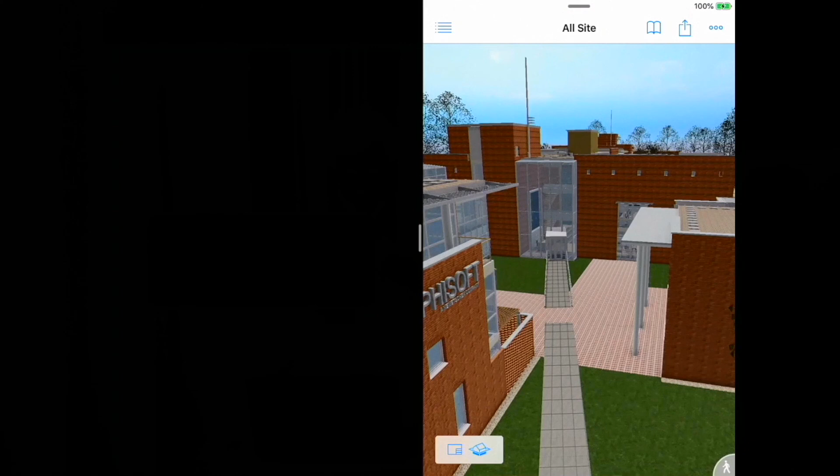You can see that it is just loading these elements into the model here, and when you are looking away, they are disappearing in the back and just dumped away. And you can also see - well, this could be bad news for us usually - that on the left, BIMX Pro already crashed because it ran out of memory, but BIMX Lab still can hold up to its name. Thank you very much.